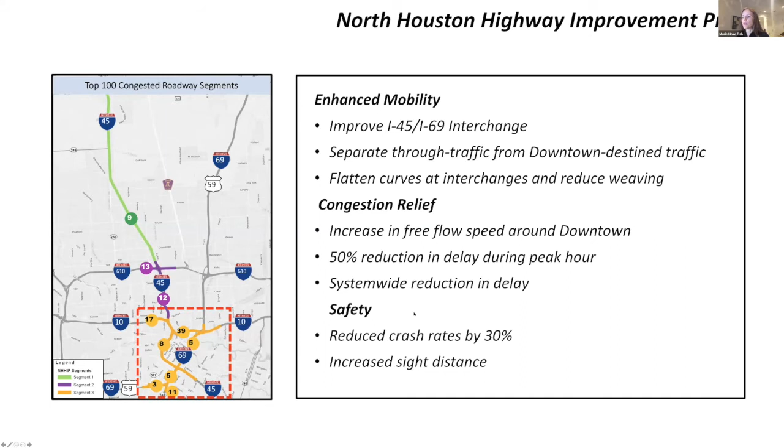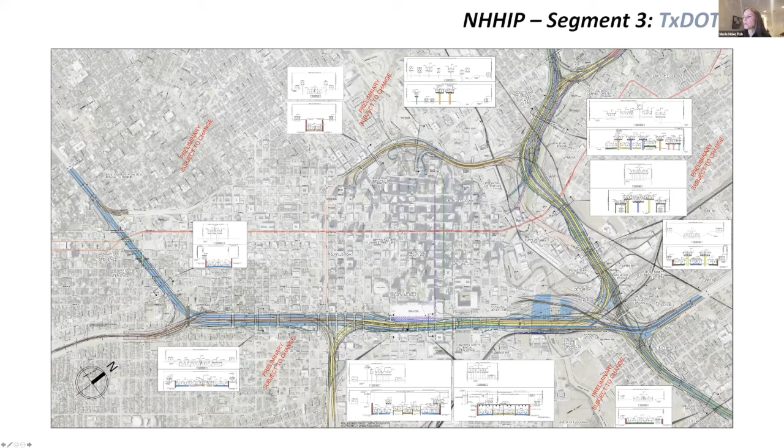That's pretty significant. This is the schematic TxDOT posted as of December 2019, showing segment 3 and the different sections through the freeway. The areas shown in lavender are the depressed sections, and the areas in red are the elevated portions.

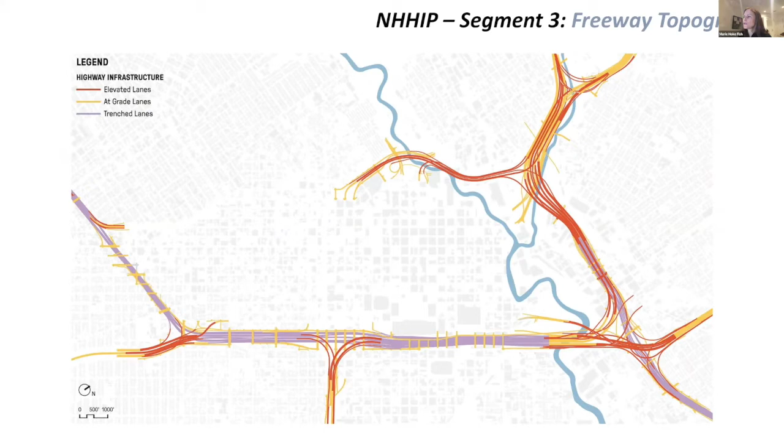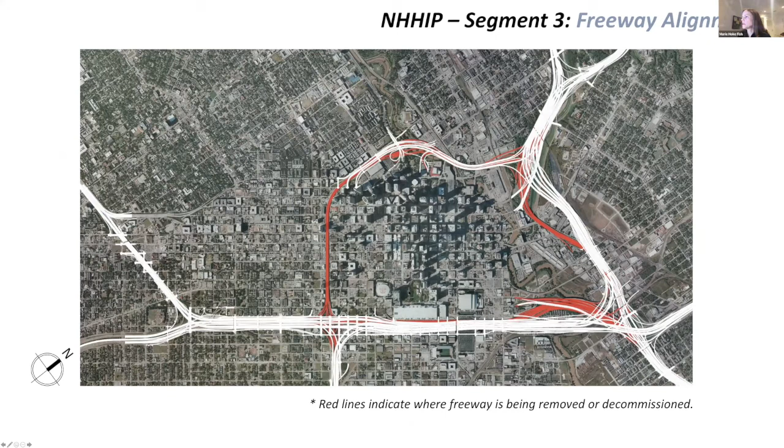Looking at it again, this diagram shows in red the portions of the freeway that are being modified, shifted, and decommissioned. That shifting of the freeway allows for new open space, and the decommissioned Pierce Elevated offers an opportunity there as well.

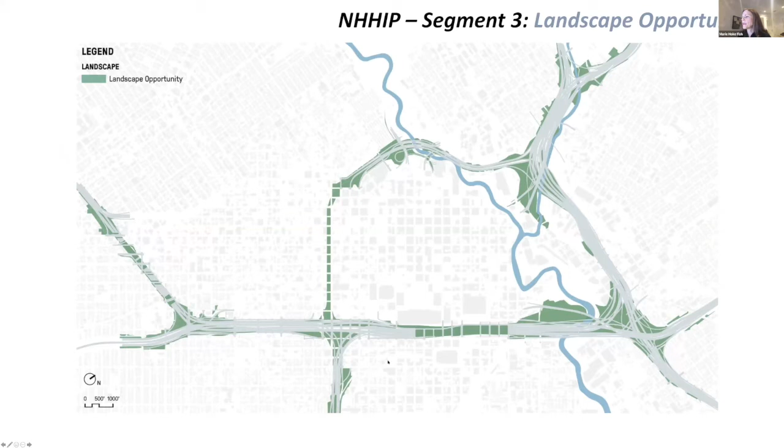At the beginning, we broke segment 3 into 13 project zones. We use the term civic opportunities a lot. What are those things? Here's a listing of them, and I'll walk you through it.

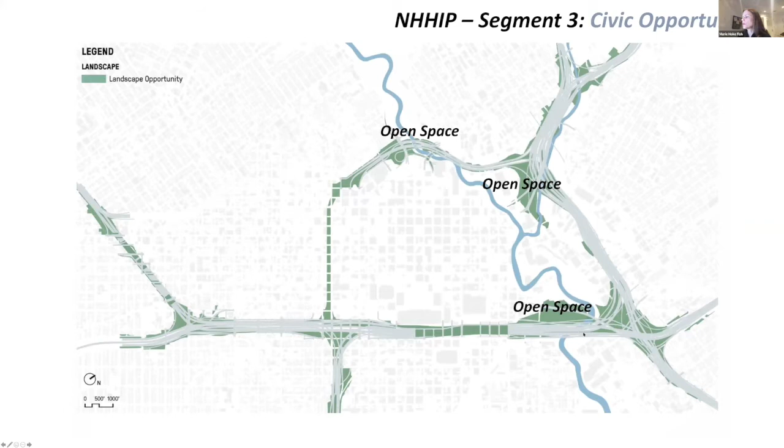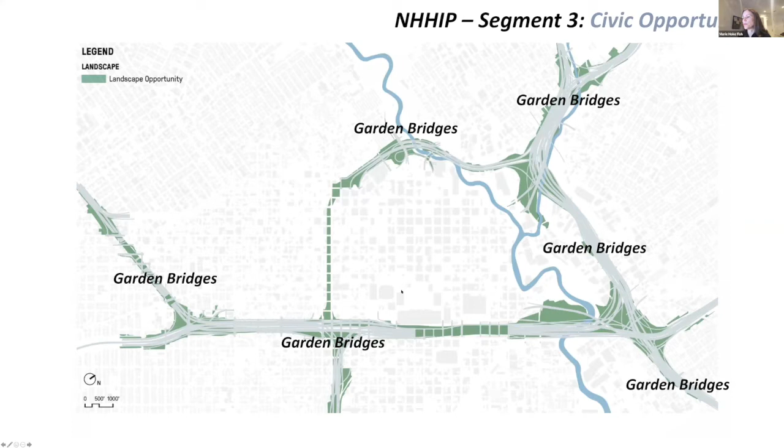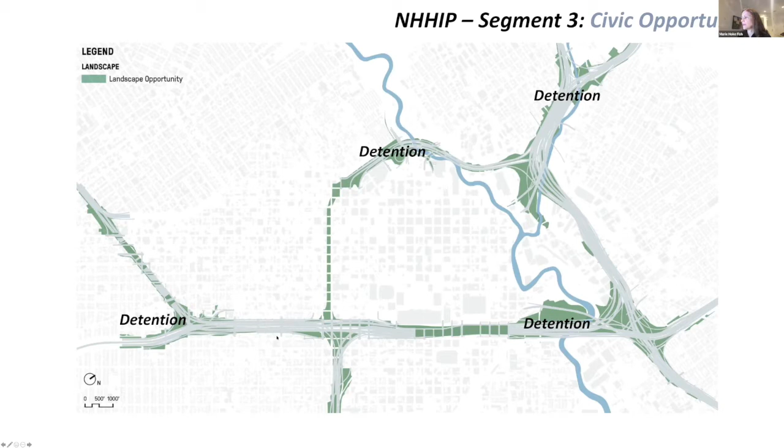Where the freeway shifts, there's new open space. Where there's a freeway cap or structure over the trench section, there's an opportunity for cap parks, and of course the elevated park I mentioned. Throughout this section, new street bridges are being rebuilt as part of this project, and we'd like them rebuilt as garden bridges. We also have detention sites, which hold water pumped out of the depressed sections. And to wrap it all up, highway aesthetics are something new to this area as well.

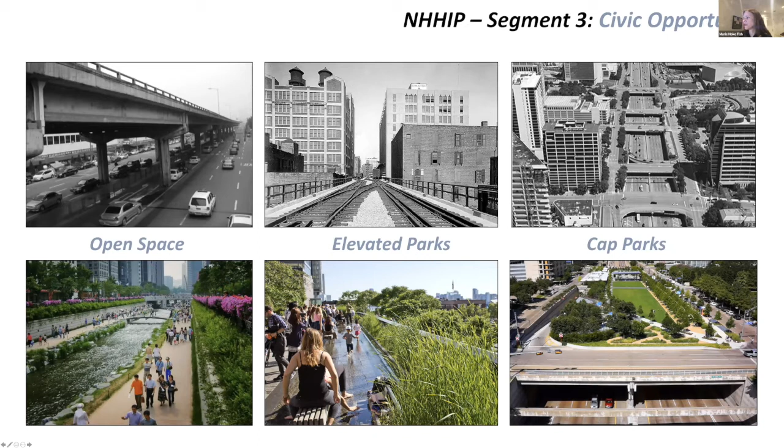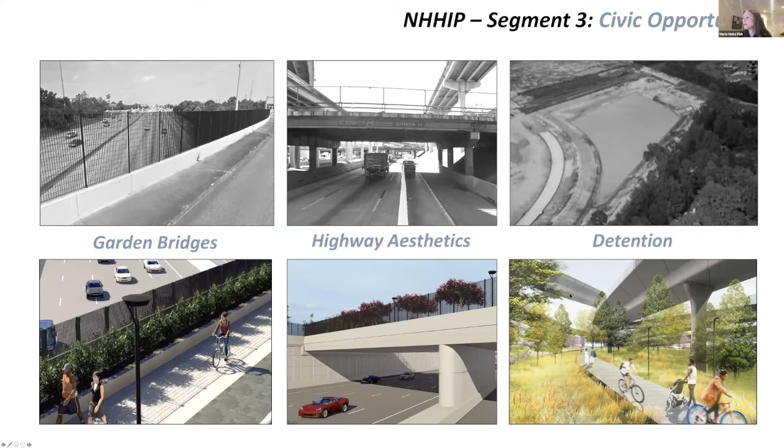The goals for the civic opportunities, or for this master plan, are to reconnect neighborhoods previously disconnected by the freeway, to contribute to the resiliency of the city, to maximize development, and to create civic opportunities that everybody can enjoy. This illustrates the master plan of all these things coming together, these study areas that we've linked together.

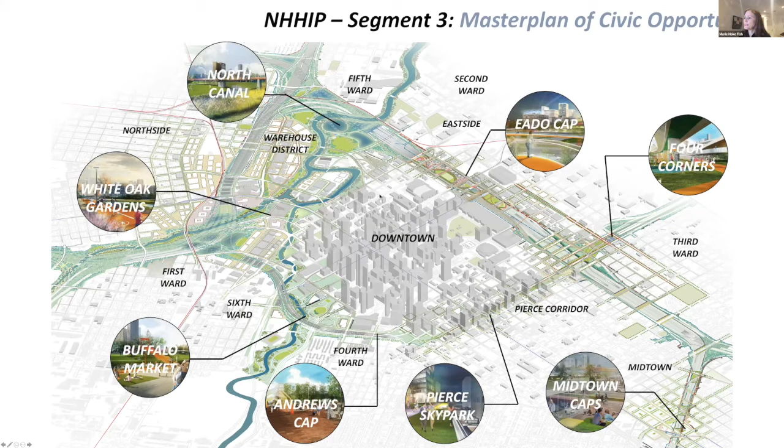What came out of this master plan study is a listing of about 35 projects in this area. Within those, there are some real standouts, like the EaDo Cap and White Oak Detention Gardens we're working on. The idea is that all these projects together help create new linkages for pedestrians and cyclists, turning that concrete loop around downtown into more of a green experience.

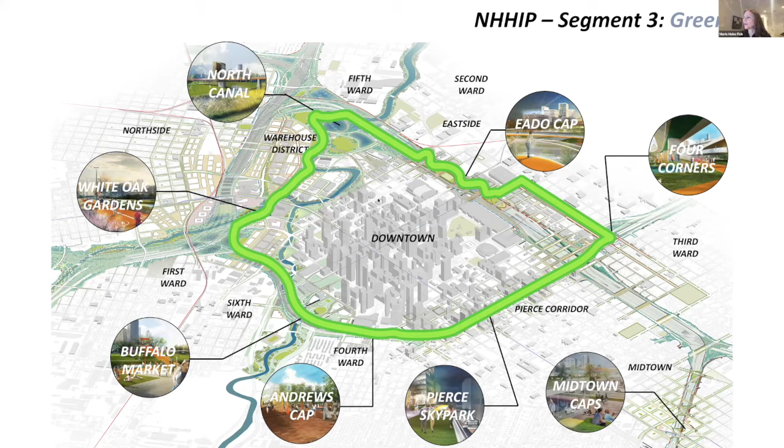How do we do that? We overlay these different project areas onto the map of downtown Houston, and you start to see connections forming, connections through open space, through trails, sidewalks, streets, and caps.

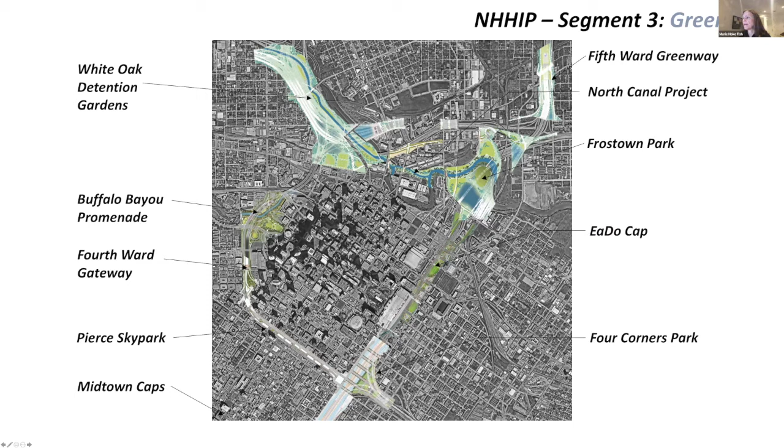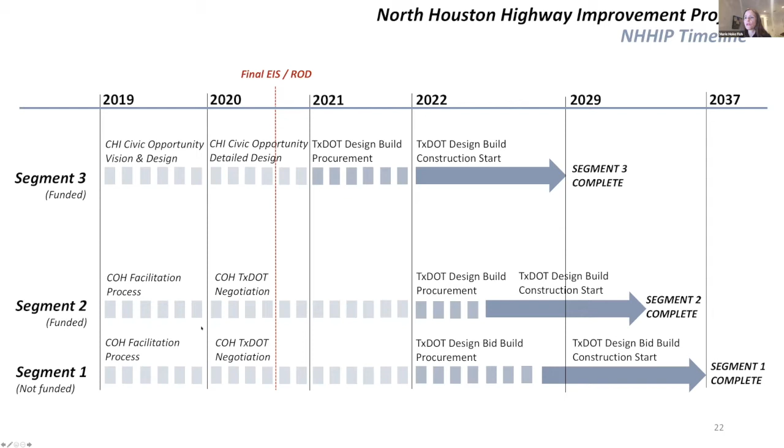Now, if you ask yourself, or you ask me or Robert, is this project really going to happen? I can tell you a good illustration of why it's going to happen is on the TxDOT website. I encourage you to look there, it's a pretty robust website. If you Google North Houston Highway Improvement TxDOT, you should land on this page.

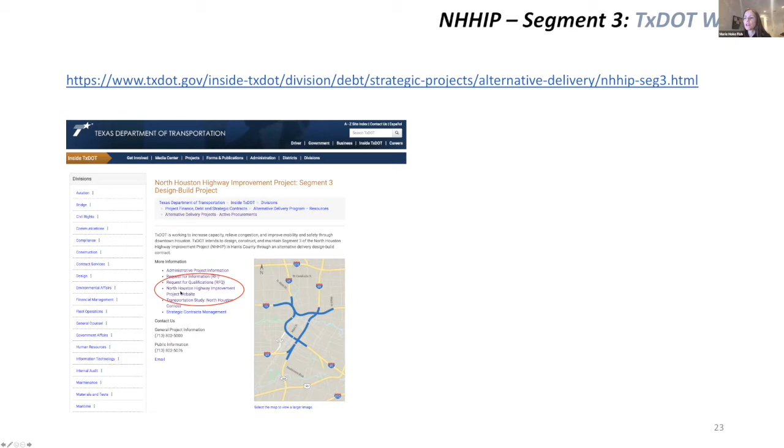I've circled a couple things here that are significant: the request for qualifications and the project website. The RFQ is important because you can see all the correspondence and postings between the initial posting on December 16th of last year and more recently up until July of this year—all the addendums, presentations, and correspondence. So the process is soundly underway, with qualifications from design build teams submitted July 23rd.

We just crossed that milestone. If you keep exploring that project website, there's a column on the left-hand side, and whenever something new posts, there's a little red flashing 'new' indicator. We had the pleasure of discovering one new thing last week: they posted a new video for segment 3 showing how the freeway encircles downtown. I encourage you to check that out.

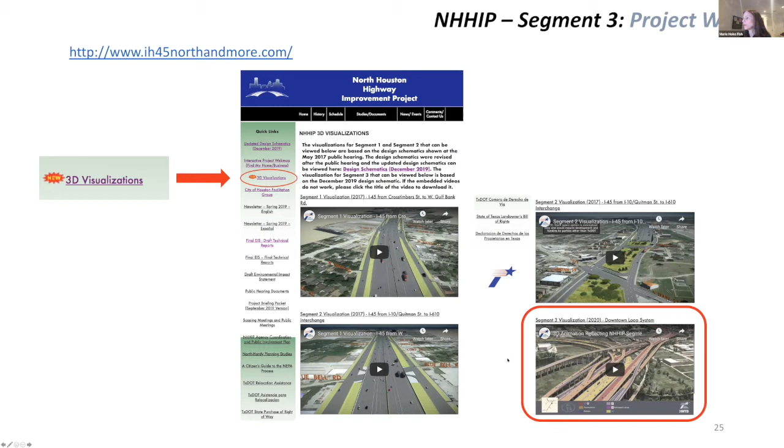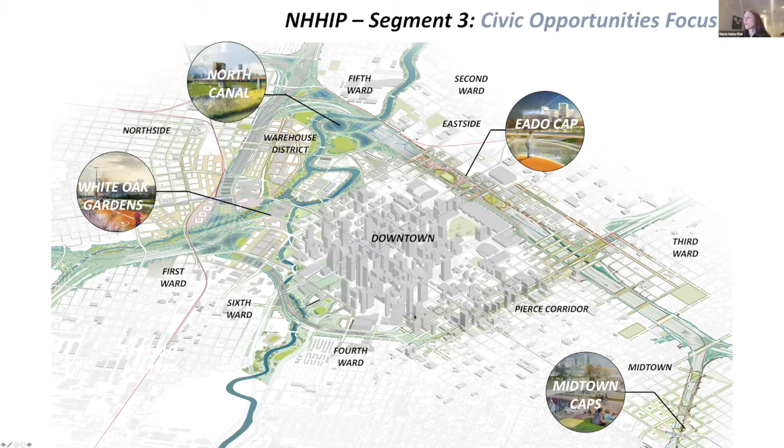There are some other things on this timeline we'll get into later. But for us, we decided this year we need to focus on a few things because of their time sensitivity—4 of the projects we're going to go into. The North Canal project is a good example.

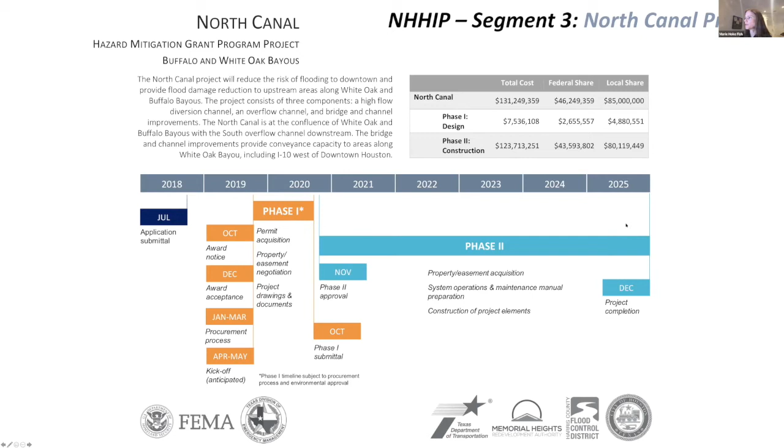It's under design. If you go to the City of Houston's website, you can find a diagram showing the award of the project happening in October of 2019. Right now we're in phase 1, where project drawings and documents are being developed, and then phase 2, shown in turquoise, is construction, scheduled to wrap up in 2025. The key thing is it's under design right now.

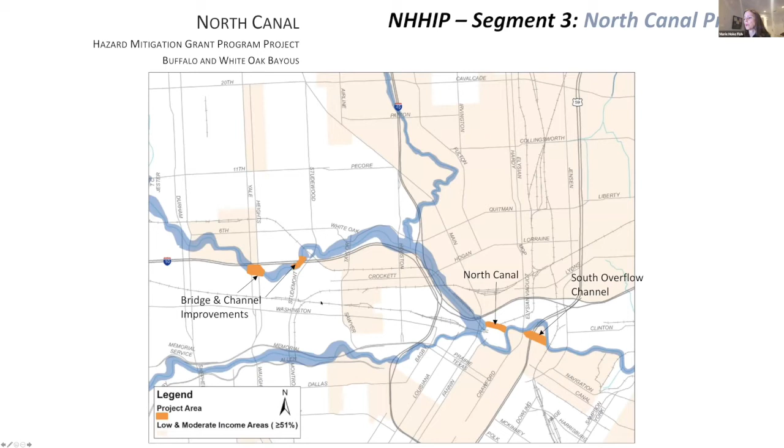This is the area the North Canal project encompasses—primarily the North Canal being constructed across this peninsula, and the south overflow channel. There are also other improvements to White Oak at certain key bridges, but the North Canal and South Overflow Channel are the two things we're focused on improving and enhancing.

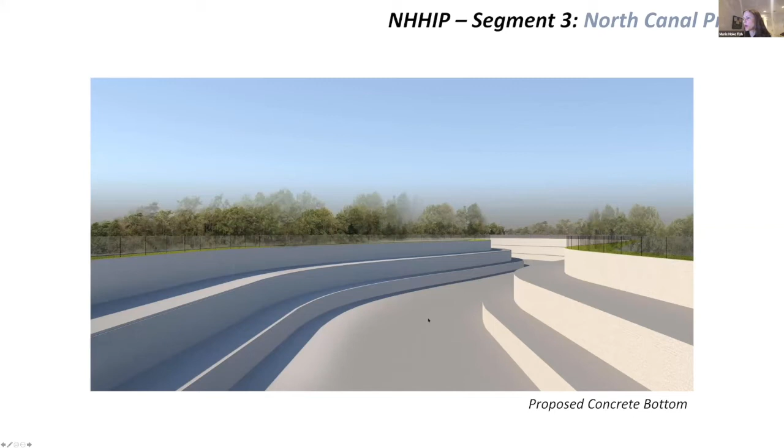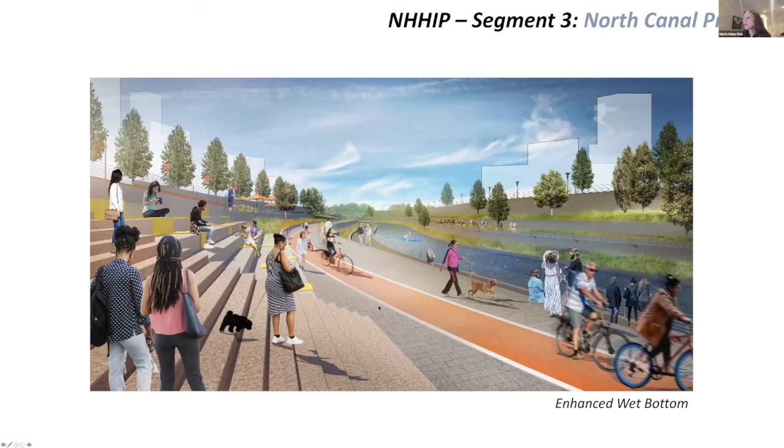TxDOT's vision proposes the North Canal project as a concrete bottom channel, which we feel could vastly be improved if it were a wet bottom channel. In the future, it could be amenitized and enhanced to create trails and other pedestrian connections and usable facilities. Another interesting aspect is the potential for new waterfront development.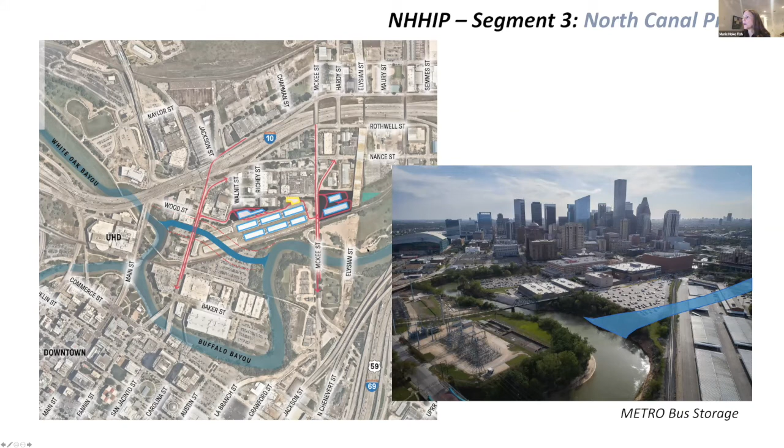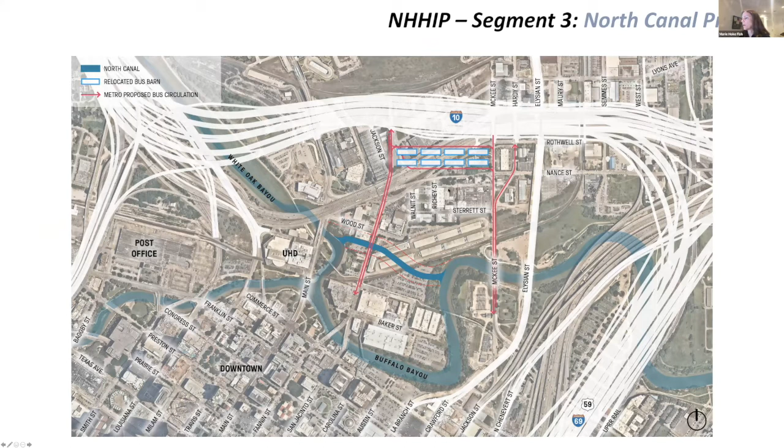You can see the Metro bus storage facility on the plan to the far right. When the channel gets cut, it cuts right through part of that facility. Metro's proposal is to relocate those portions to the other side of McKee. We're suggesting there might be another way, with a new alignment of the freeway to move the Metro storage facility into the old right-of-way and hug the freeway. That would allow us to take this waterfront condition and provide new development in that location.

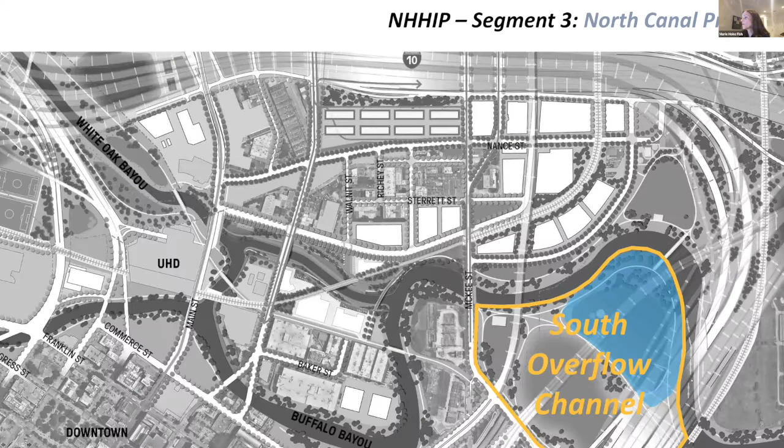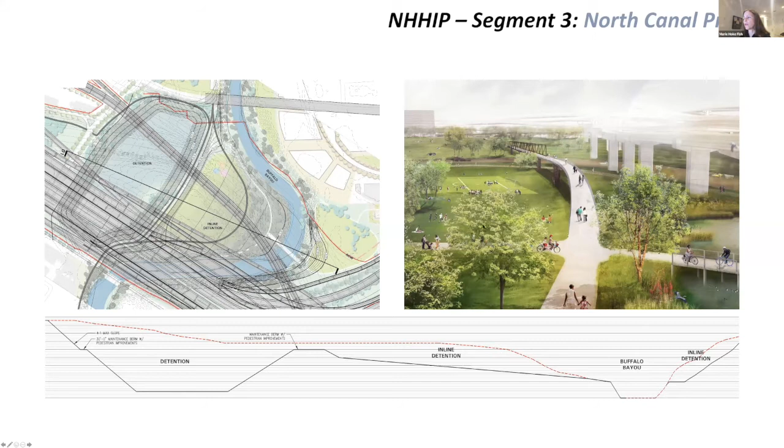The south overflow channel also holds opportunities, in that if we can allow the water to flow over the top of this area rather than cut another channel, it allows us to flatten out the land and make that usable recreation area, while still preserving part of it for more of a traditional detention area.

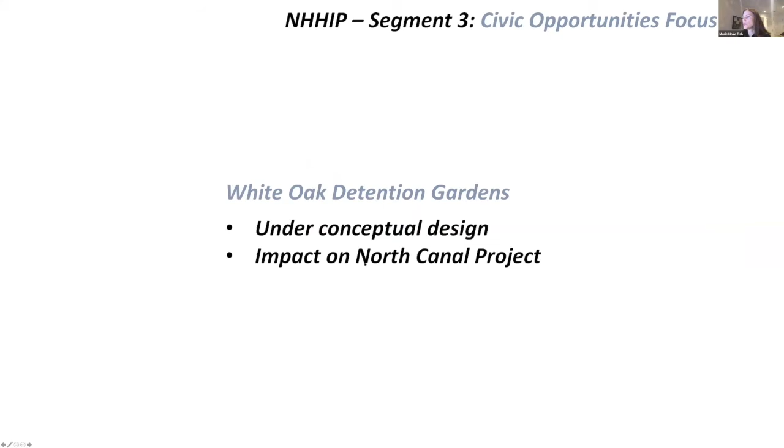White Oak detention gardens are a more recent idea, something we're exploring with a group consisting of a lot of different people. This does have some potential impact on the North Canal, so we need to be in lockstep with that project. This is the area we're talking about along White Oak, the trails, the Be Someone Bridge, and the freeway infrastructure that's going to be placed here.

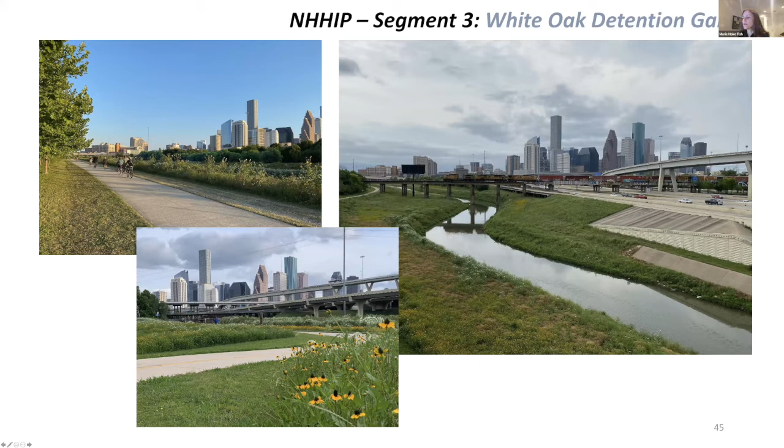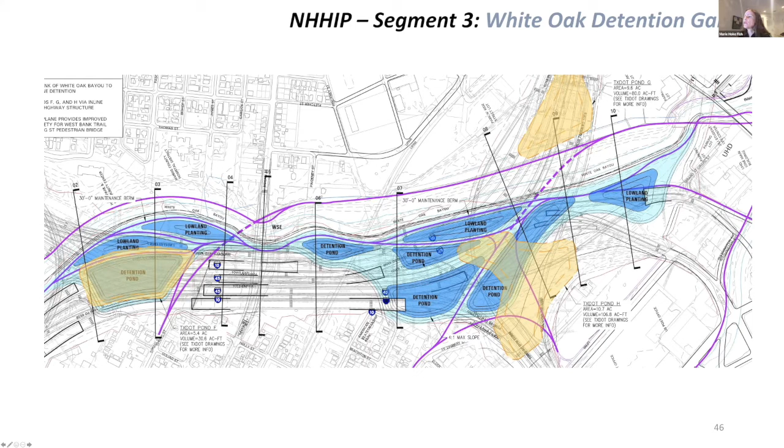There's quite a lot of structure going to occur here that we really need to visually mitigate. SWA has helped us develop an interesting proposal to TxDOT where we take their three detention areas, shown here in light orange, and reconfigure them along the bayou to flatten out areas so we can plant trees to hide some of the visual clutter, and also create new trails on that side of the bayou that don't currently exist.

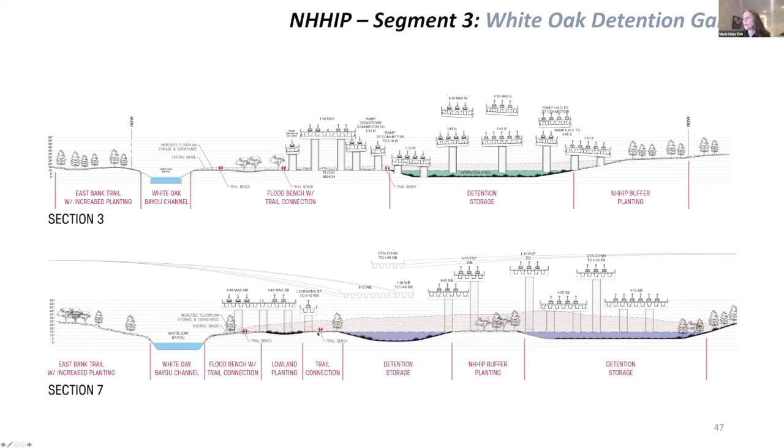That has an impact though on the North Canal in terms of upstream, downstream impact.

Another time-sensitive item is the area in Midtown, because this portion of the project is under a different procurement—it's design bid build rather than design build. It's on its own schedule, and while it runs parallel with the segment 3 design build part, it's under design by TxDOT engineers. So right now, in helping them shape the forms of the caps and bridges, we have opportunities.

This is currently what they're showing as their intended layout for this area. You can see three cap elements and several bridges. We obviously want to propose to green those.

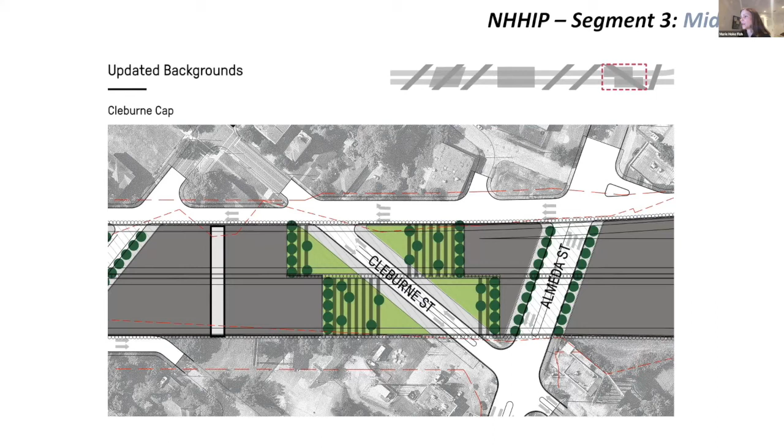Here's an example at the Cleburne crossing where if this were a sea of concrete rather than green—this is the green, this is the sea of concrete—we don't want that. So we're making sure we develop the details necessary to plant on these caps, because it's a much better condition than this.

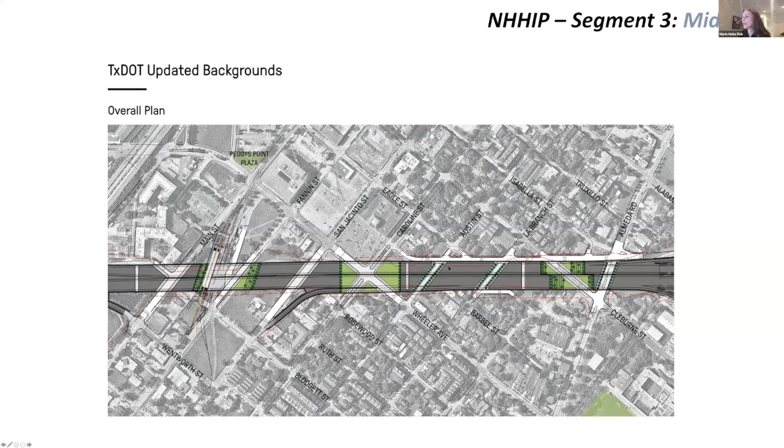In having close communication with TxDOT on this, we're able to catch things. Like we caught this at our last meeting, where there are these little wings being added to this bridge because of the structural span here. So we're saying, could we do better than that? Are we able to shift that around so we get more usable cap space? This is a work in progress, and we're actually meeting with them this afternoon to discuss it.

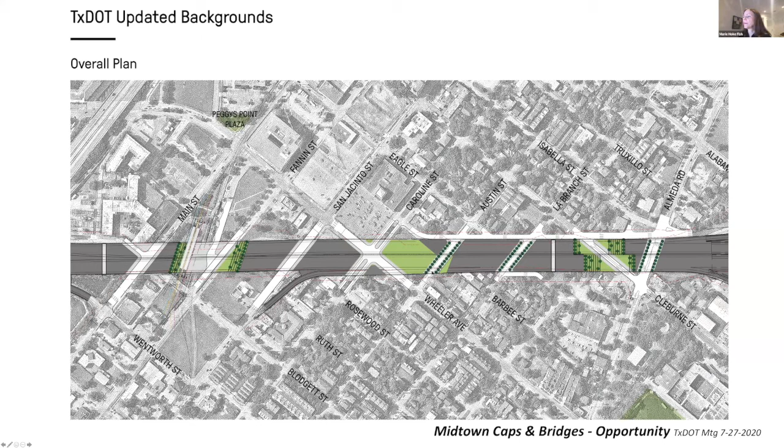Okay, so now I need to catch my breath and stay on pace. The garden bridges are again an important part, and Midtown offers us the opportunity to really study this in more detail.

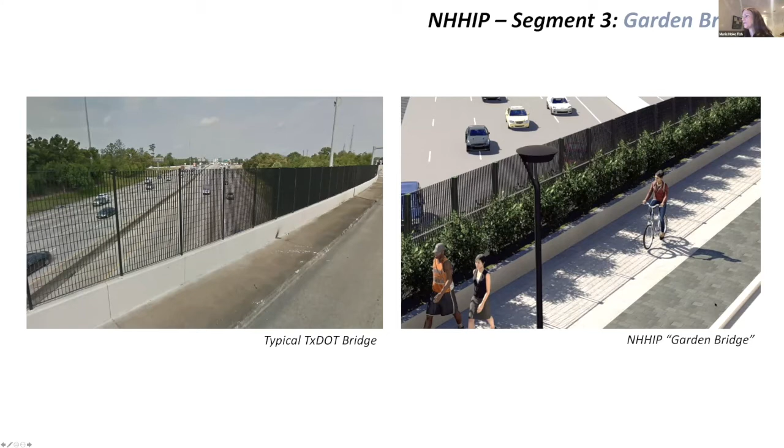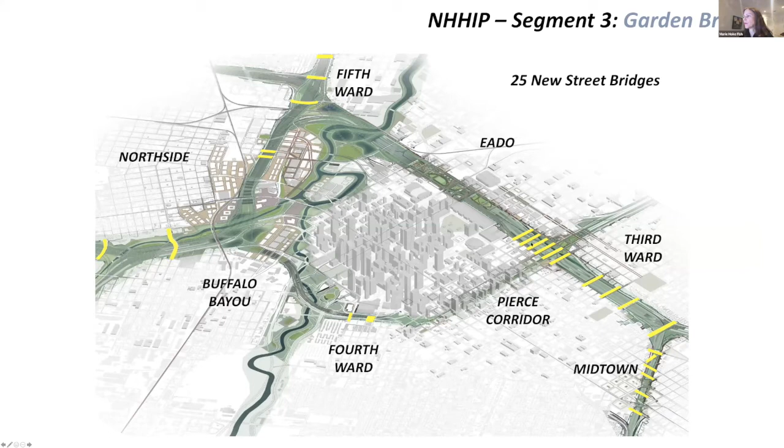This is an example from Westcott at I-10, where this walking path is probably about 4 feet max. In the new condition, we really applaud the City of Houston's leadership—they've negotiated much wider bridges that allow anywhere from 12 to 17 feet of pedestrian realm on each side. That's important because there are 25 new street bridges being rebuilt as part of this project, and we want to make sure they're rebuilt to high comfort levels.

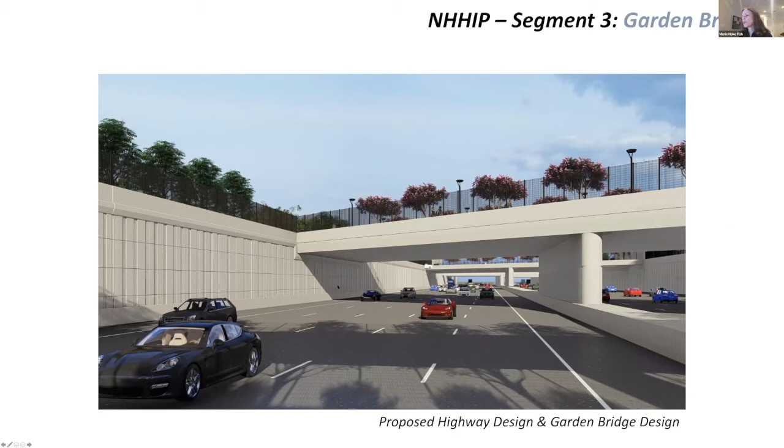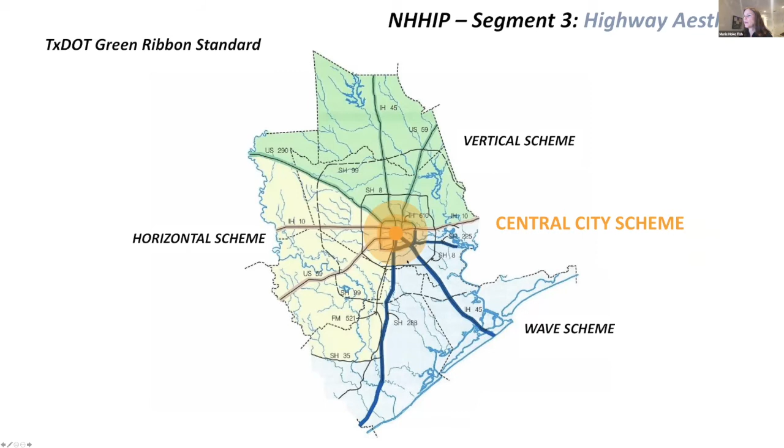And aesthetics—aesthetics are the thing that tie it all together. When we have bridges and caps below, we have a trenched highway, and we're trying to reconcile the current green ribbon, which has three different themes throughout the city, with a more neutral central city scheme that provides some verticality but is also more subdued. Because for us, the really important aspect of the green ribbon is the green part.

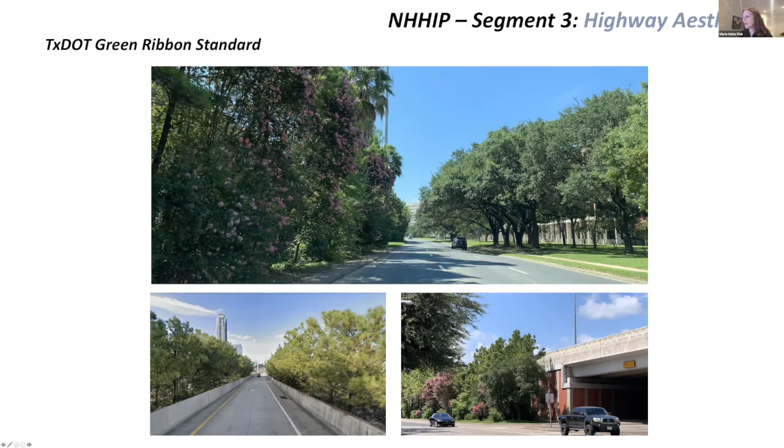Here are some really good examples—there's Uptown, and this is 610 at Bellaire, of great greening. We want to make sure we provide that as well.

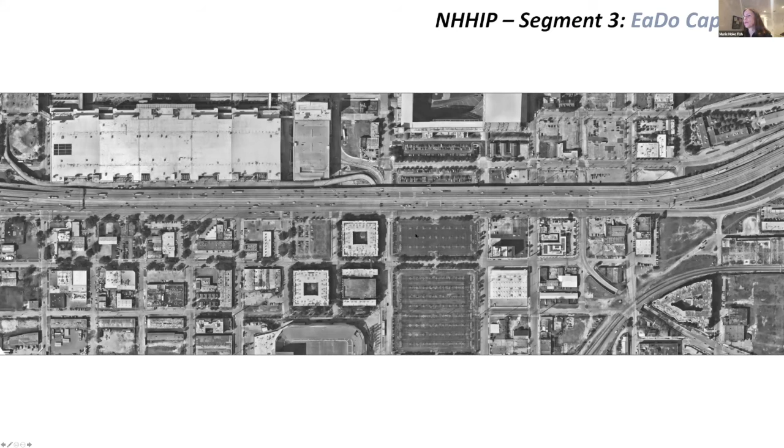Lastly, we have the EaDo cap, which is also time sensitive because of the development study we've been engaging in more recently that could have a possible impact on the TxDOT supporting structure for that cap. So when we last left you in September, you would have seen this—this is our 30-acre cap park.

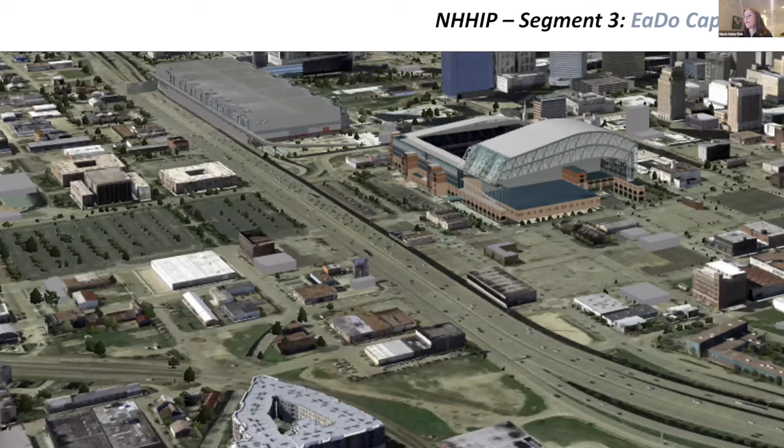And this is the condition we showed you back then, the before and the after, and the significant impact. This is a large area, and that's also a large area to maintain if it's a park.

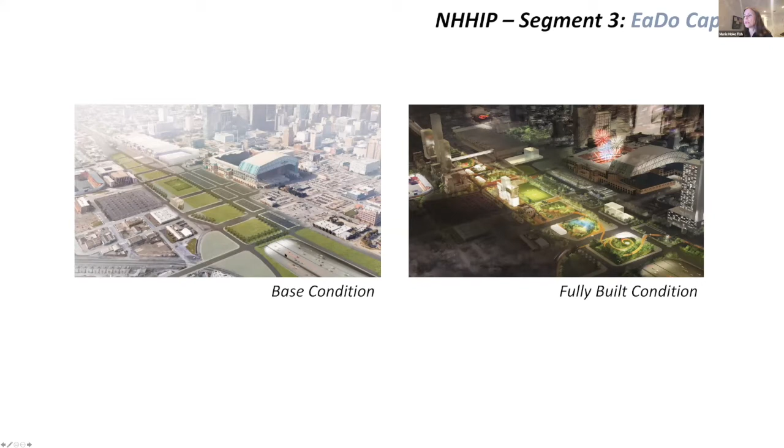We started looking at a base condition because we knew we probably couldn't have the fully built condition initially. So what was a minimally acceptable condition? And so we said grass and some trees.

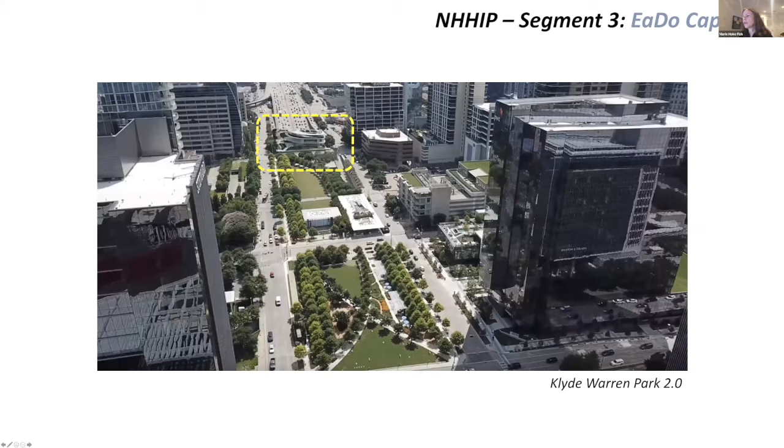But then Klyde Warren 2.0 happened in Dallas, and we started taking a look at that, because that park is about 5.2 acres, so quite a bit smaller than ours. Theirs is about a sixth of what ours is, and they're looking at a structure of 3 to 4 stories on the end of their cap.

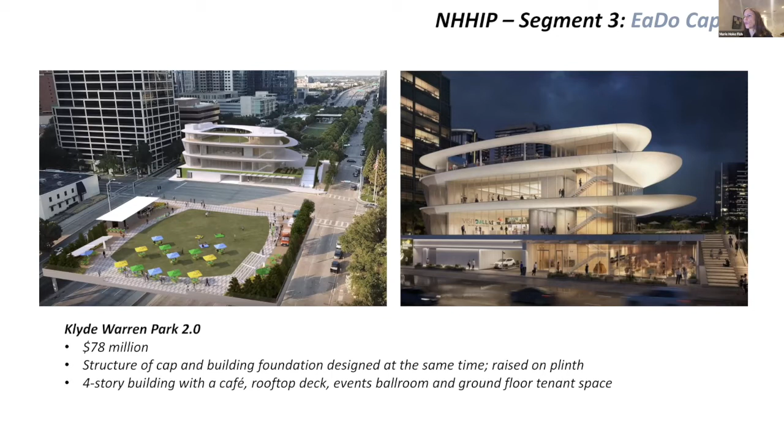So we said, should we be really considering how development engages along with green space on the structure? And so we engaged Walter P. Moore to help us study what kind of things could we put on the existing structure that don't require any additional reinforcement. So we landed on 4-story sticks and bricks, 2 to 3 stories of steel, lightweight steel frame are the type of structures that can go on there.

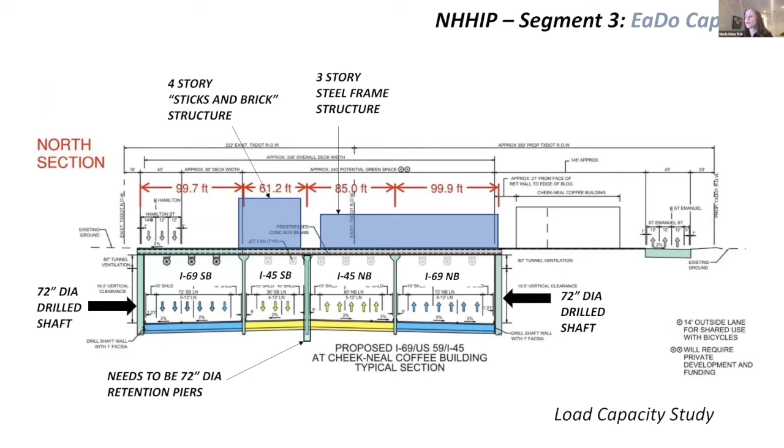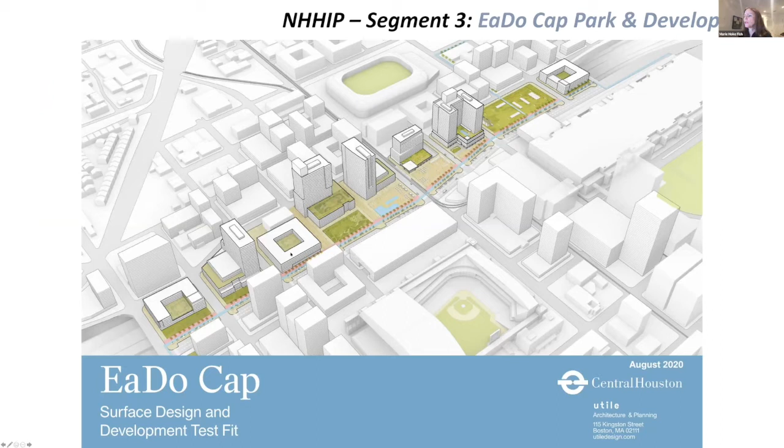So then we took that one step further and we said, okay, well, what can we do if we enhance the structure below, really looking down the road at the long term? And so we engaged with Utile to do a study for us.

And 2 key things, we really wanted to understand how this area was being used and the impact of the sports venues and neighborhood presence and the GRB. We also said this is an important linkage on that green loop that we were talking about earlier. How can we really support that?

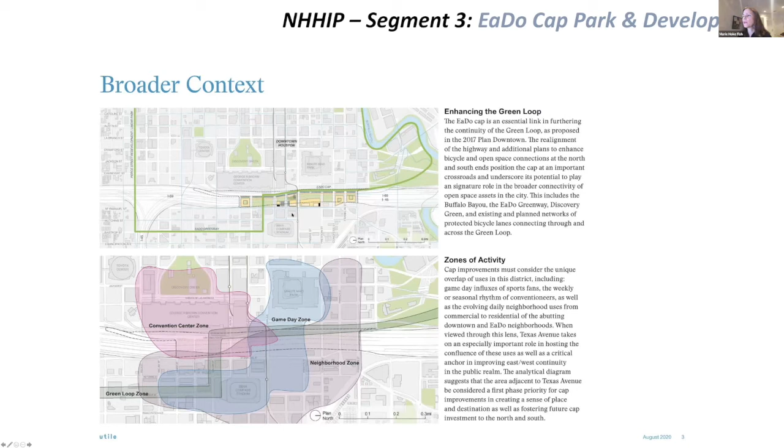That can support the necessary people that we would need for a World Cup gathering, a fan fest. It's also a space that can be flexible and used for George R. Brown Convention Center needs. And then we also said, recognizing that Texas Avenue is a heavily walked, traversed area between the sports venues, that might be the ideal place to put a public market and plaza.

And then we also have vent structures that we're coming to find out are needed in about the center of the cap, and that's to exhaust the tunnel system below. And those can be quite significant in size.

Lastly, and more importantly, we have the EaDo Ramble. It's kind of a nod to Las Ramblas in Barcelona, but it's a promenade that links from one side to the other. It's about 3,300 feet long, but it can serve as the anchor that development can plug into.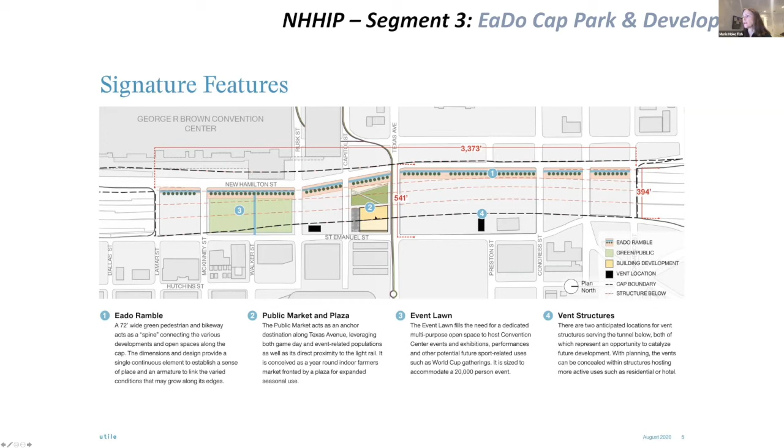And this is what that looks like. It's a place accommodating cyclists, pedestrians, and all kinds of people from either the neighborhoods of EaDo or downtown. And then over here to the right of that, you see the public market and plaza.

And one of the things you'll note are the tall buildings. This is on the EaDo side. There's a possibility of doing land-based tall portions and smaller plinth structures on the cap.

But what we discovered when we started putting buildings on the cap is that there's plenty of space left over for open space and green space. So we felt like we were on the right track in terms of breaking down the scale of the EaDo cap.

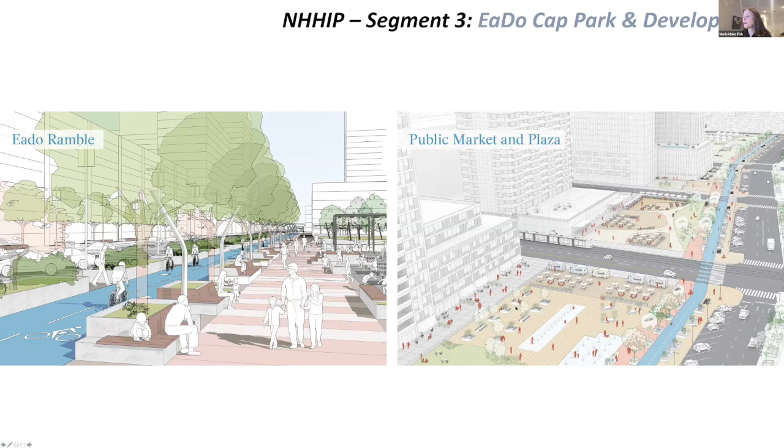You can still have your event lawn, and again, accommodating these vent structures that for the Boston Rose Kennedy Greenway were quite huge. They had these big buildings that wrapped around them.

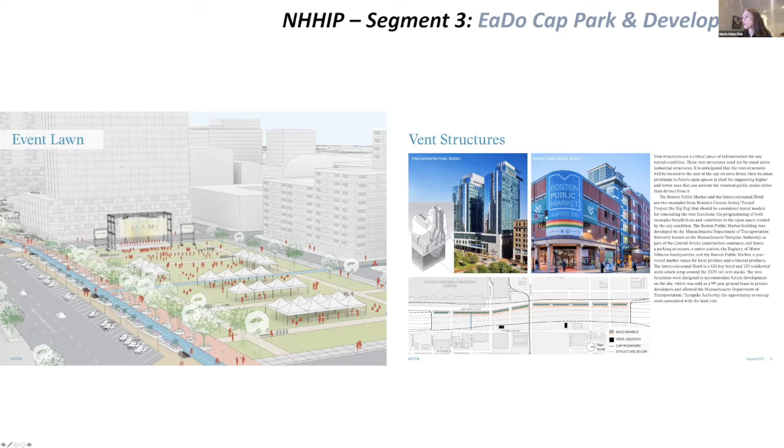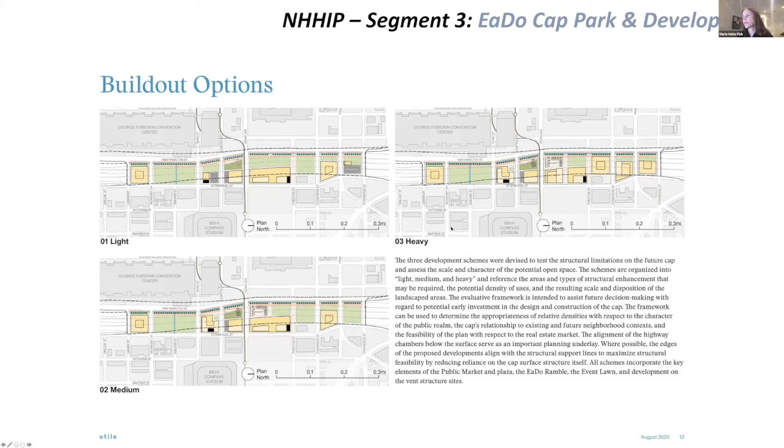And then we said, okay, with those 4 elements in place, let's study 3 different options for development: light, medium, and heavy. Light being no adjustments to the structure of the cap below, medium, a few modifications, and then heavy, more modifications. And the reason we would want some modifications is to allow taller buildings.

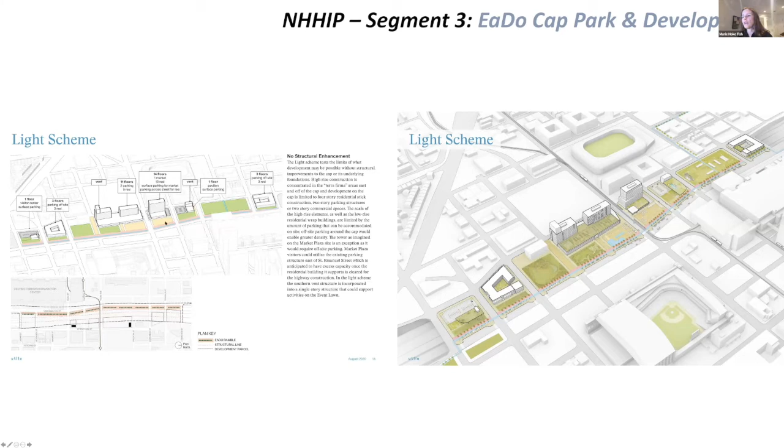On the light scheme, you can see here that the taller buildings—it's kind of hard to tell from this diagram—but these are on the land-based portion of the cap. So that's why they're taller. And this scheme does not require any modifications to the structure below.

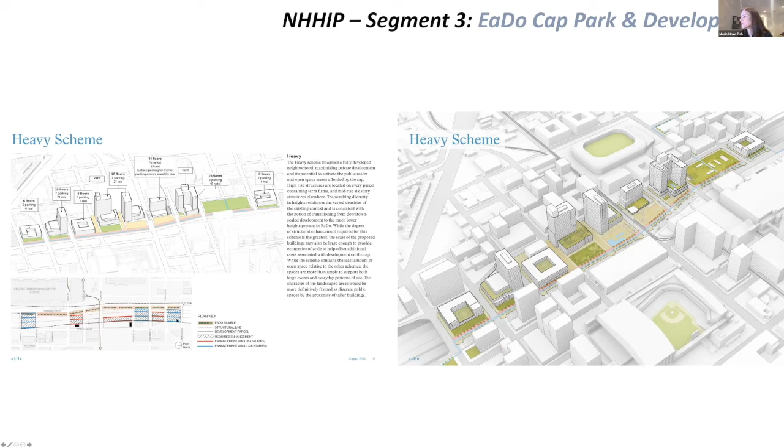The heavy scheme does involve some modifications. You can see some of the markings here in the bottom left that indicate where the enhancements need to be, and we're actually costing that as we speak to understand the impact of that.

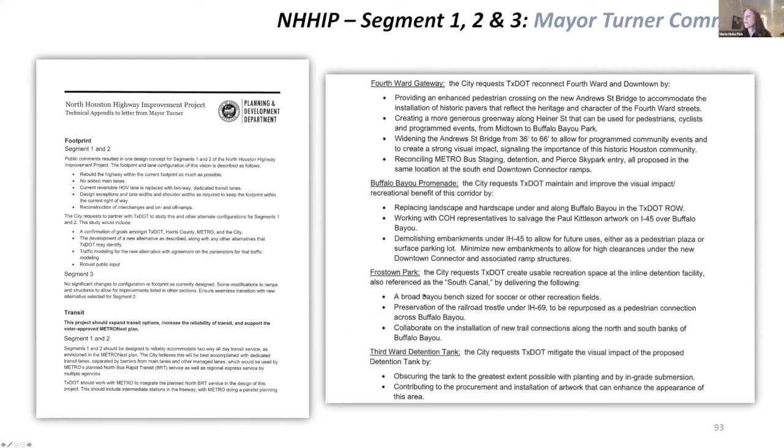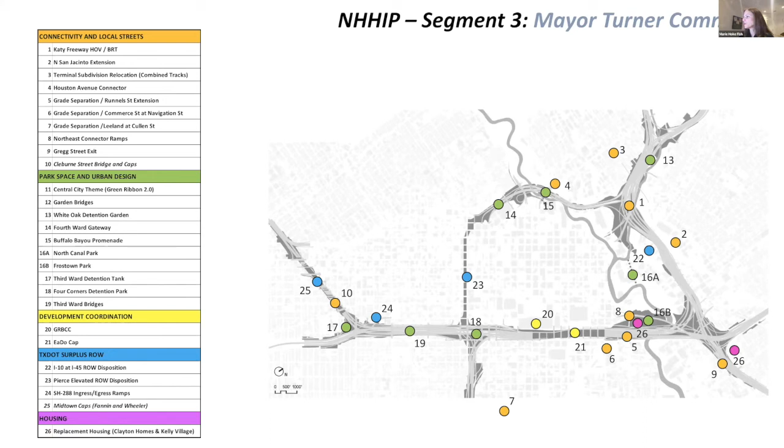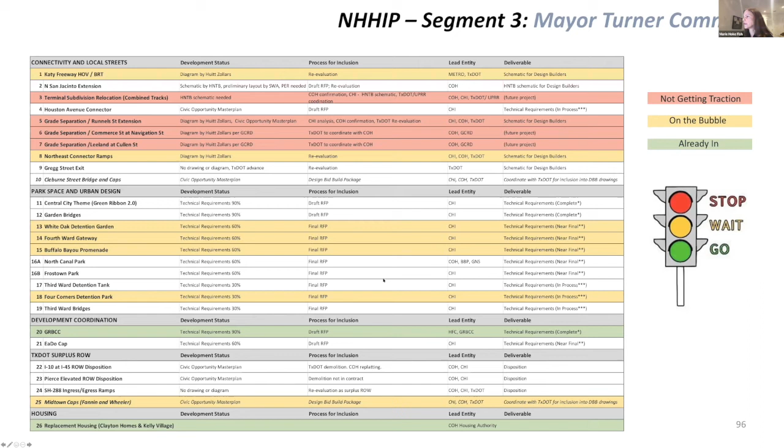And then we said, okay, let's use this as a roadmap, and let's talk about the ones that are not getting much traction. Let's identify the ones that are on the bubble and the ones that are already in. And so we were left with some white areas out of here, and we said, let's color code those with a blue color and call those more than on the bubble. They really are close to getting in, but they need a little nudge.

The ones that are in red really need support. And of course, there's a new category of purple that requires critical City of Houston leadership, and that has to do with the right-of-way acquisitions that need to happen.

So we resorted this and said, okay, this again is our roadmap, so we can keep track of the things that need careful attention. Fortunately or unfortunately, all of these need attention about the same time, but we did focus, like we said earlier, on those ones that are very time sensitive, because we need to continue the dialogue about potential funding sources.

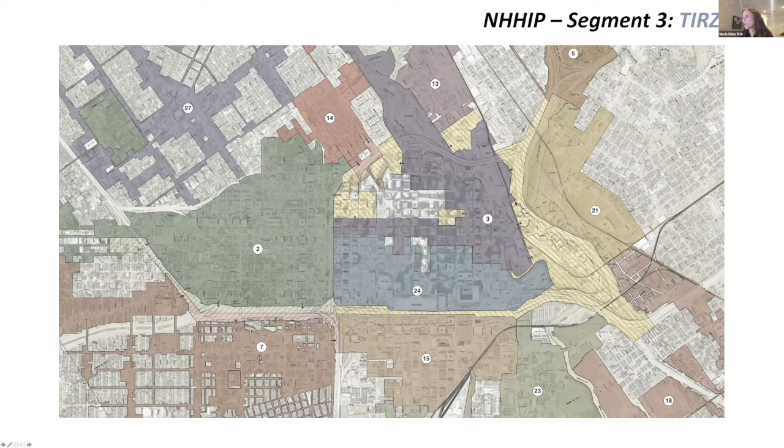We have examined all of these, and one had a very positive outcome, which was the expansion of our TIRZ back in December, TIRZ 3, which you can see in purple and has expanded now into this yellow zone that helps pick up the areas of the project that would allow us to more actively support.

And then we also recognize that the management districts play an important role in this because of the maintenance agreements that need to be in place for any kind of landscaping or other such improvements.

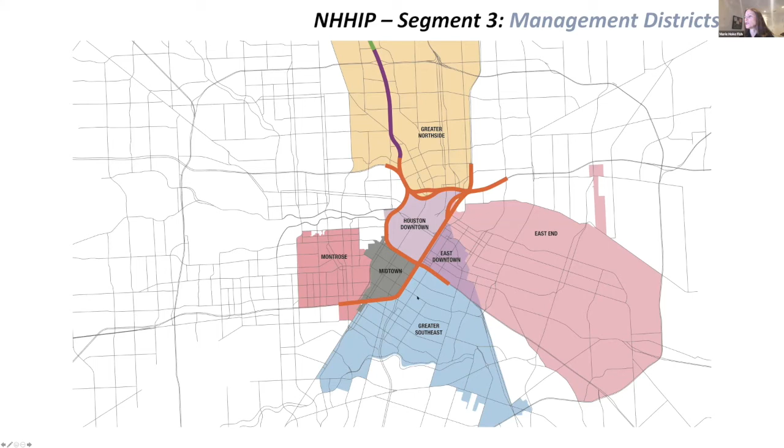Also is the interest and involvement of our state representatives. These are color coded: Representative Garnet Coleman, Representative Christina Morales, and Representative Harold Dutton. These areas are their areas, and they are actively interested in what is happening.

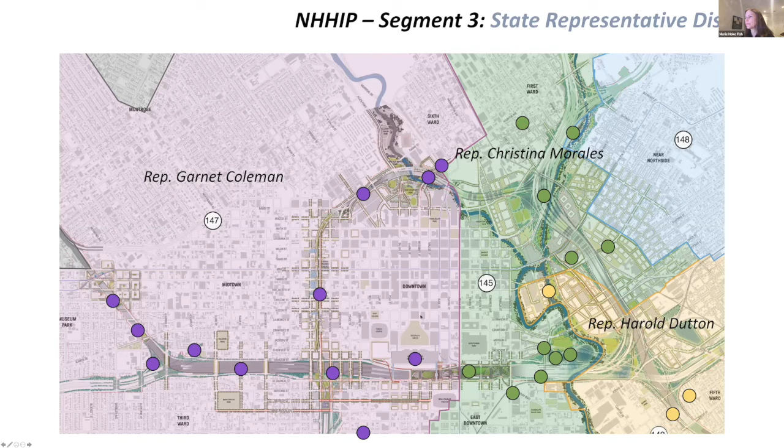So we also have engaged with the county officials and commissioners, and again, it's been great to see their interest and involvement in the project and their support for improving the project.

This timeline, again, we're revisiting here. You saw that we talked about the RFQ and the RFP. Well, the mayor's letter really was a big threshold for us to say, this is what we want from TxDOT, and for TxDOT now to be in a position of responding back to that.

And so once we clear the FEIS and record of decision, we can really start to get into more detailed discussions. But we also have the draft RFP coming up in the next month or two, and that's where we include our requirements for the highway aesthetics and garden bridges. Then right before the final RFP that's going to be posted next year, all the projects get considered for inclusion in that.

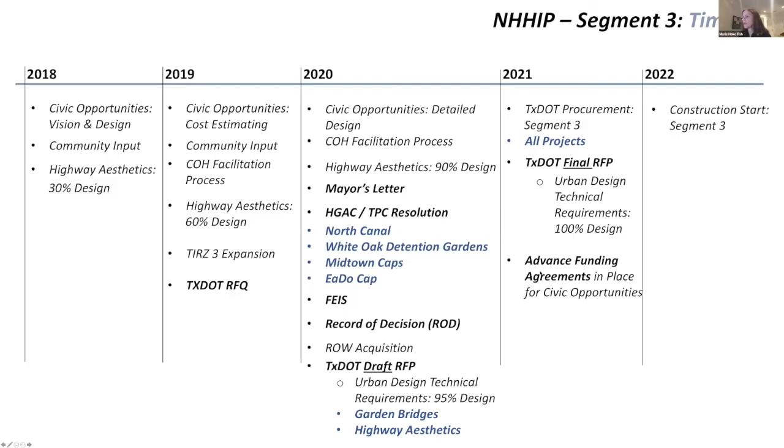So I hope I haven't overwhelmed you with information, but here is the portion of the program where we'd like to take some questions and answers.